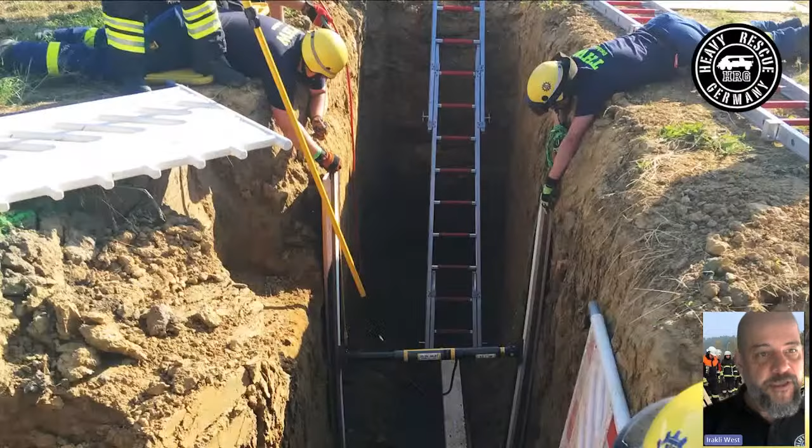So just to kick things off, to manage expectations, etc. And why this picture? What you see here is what we're going to be talking about. The first step of trench rescue is what you see in this picture. Hold back your questions because hopefully we'll have a proper explanation about this a bit later. But this is what we're going to be talking about.

A little bit about myself: born in 1968, and I'm active since 1985 as a volunteer firefighter in Germany outside Munich. The main vocation is with a USAR team. We're an INSARAG classified light team. I've been to a few deployments. I'm a team leader. Don't worry too much about the lingo, it's German. I am a consultant for one of our counties around here. We're setting up a system for trench or USAR, which I'll talk about a little bit later.

Heavy Rescue Germany itself exists since 2009, and it started parallel to my work with Paratech, where I was employed 2009 to 2015. We started working in Germany when it was very empty considering equipment. So we set up this HRG, as we call it, to offer training together with the rescue equipment. We've been on our own, independent since 2015. We are a distributor for Paratech for about half of the country, and we manufacture our own equipment. We also do training.

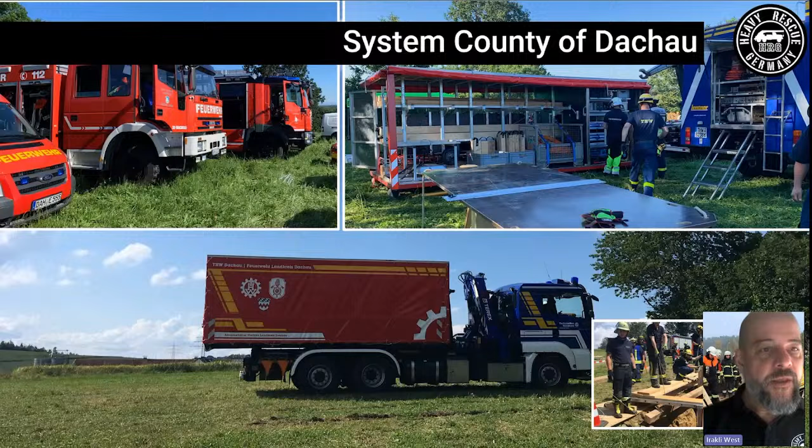So as an example of how this works, now without going into too much detail, we have a separation in Germany between local fire departments and the Federal Agency for Technical Relief. They're federal, they're the blue guys basically. And sometimes there are two separate entities. So we would have the fire department starting the work, and then all the heavy stuff comes in from what we call the blue guys, or THW is the short for that organization.

And what we'll see here is basically the system we have in the county of Dachau, which is close to Munich. We have first due fire departments that are trained in trench rescue. And further along the line, we will get this pod, which has got all the timber, the shoring, more struts, measuring equipment, etc., which will be brought by THW.

So to give you a little understanding of where we are, we did write a book. There's only one book in German about trench rescue, and it was written by us, where we introduced what we call the rescue shoring to this country. Thanks to all the information and all the courses we did in the States and the UK, we translated that into German, not only the language but also the entire system, including all the sizes, the dimensions, etc., to have something that works in this country.

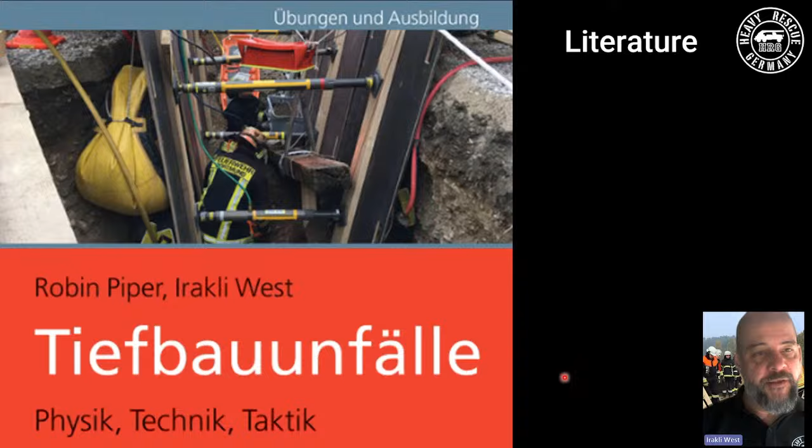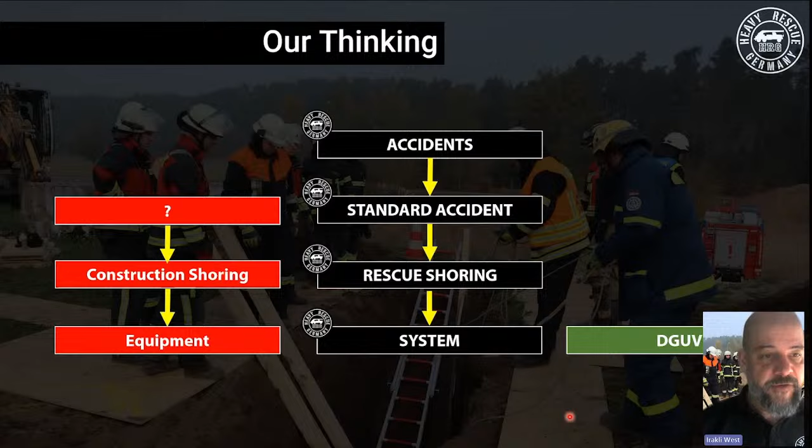This is a very long topic, and you could go on for hours and hours. So we want to concentrate a little bit on the first due. In any accident, the first responders will be either private persons, but we're talking about rescuers, which in our country will be a fire department with a rescue engine. And we'll look a little closer at what they can do to make sure this entire incident is managed the right way, and we get the right equipment with trained guys with the right training, etc.

At Heavy Rescue Germany, anything we do, we will split into 5 steps, which are a bit of a help especially with topics like trench rescue or USAR, which are not very everyday and not very common. It's a little bit difficult to find the right word. The first step will be a 360 to get an understanding of the situation. And this first phase ends with a communication with orders about what to do.

Then we want to secure the site or the incident, which means we will freeze it in place and make sure it doesn't get worse for the patients and for ourselves, the rescuers. In case of trench rescue, we would start shoring, and we would also start preparation of the rescue and actually perform a rescue. Something fire departments like to forget in training is actually about the patient.

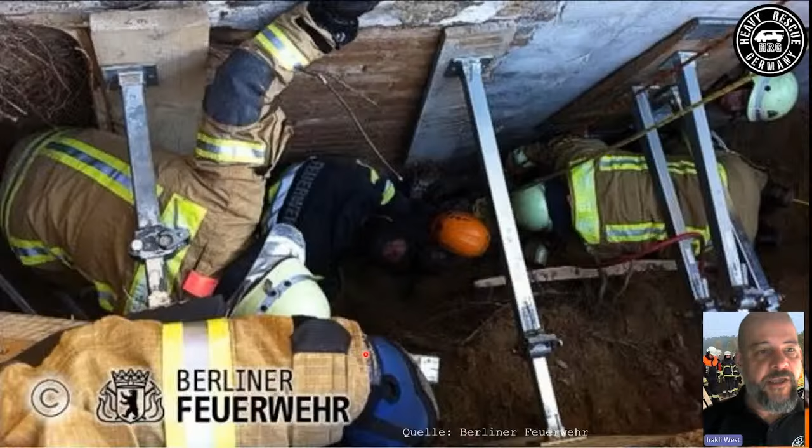So let's look at real accidents, what they look like here. And here's an example from Berlin, where it's a very typical type of trench rescue accident where a private person will dig out soil around a wall, a basement, to perhaps put a new liner in the basement or repair some bricks or whatever. And of course, private people don't know much about regulations and all that, and so they dig it the wrong way. There's not enough sloping, etc., and they get trapped.

And what we see here is very typical for our country, where we would have some kind of struts put in and no real shoring panels, and also the clothes worn. These are their normal firefighting clothes, so they tend to be sort of heavy and they're nice and warm, but they're very bulky.

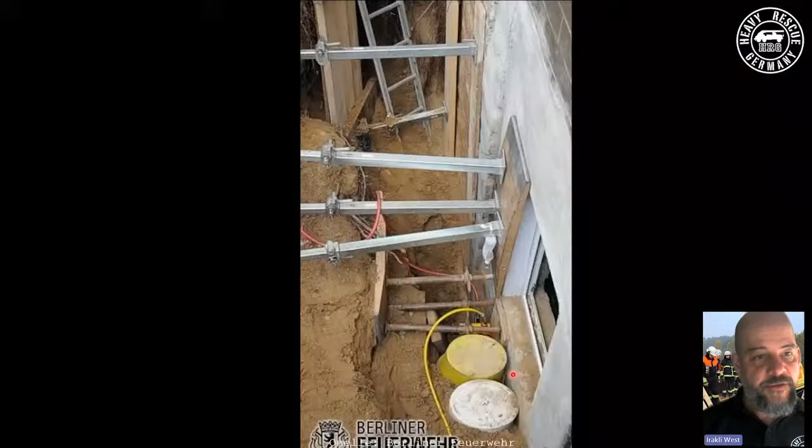So here's a couple of impressions. And what's typical of trench rescue is that it's a lack of space, basically. So at the top, you might have like a V-shaped trench where it sort of goes narrower towards the bottom, and at the bottom there's no room at all to work, and that's very typical, and that's not a German thing, that's a normal thing. So you must expect difficult working conditions.

State of the art, or state of things, until recently, or still is actually, is what we see here, which is a trench rescue, a partial collapse. And we'll see the type and quality of shoring that's been done is not too great. And one thing that's very important is when we show examples of things that could be done better, it's never a criticism of people in the picture. It's a criticism of the system, which is responsible for making sure that rescuers are working in a safe environment.

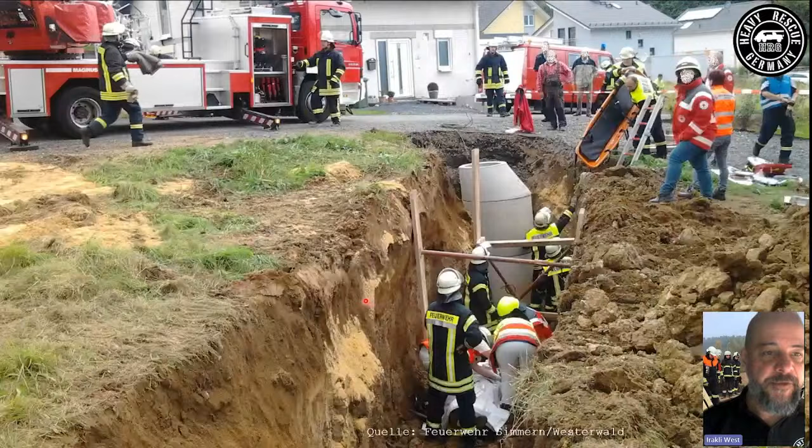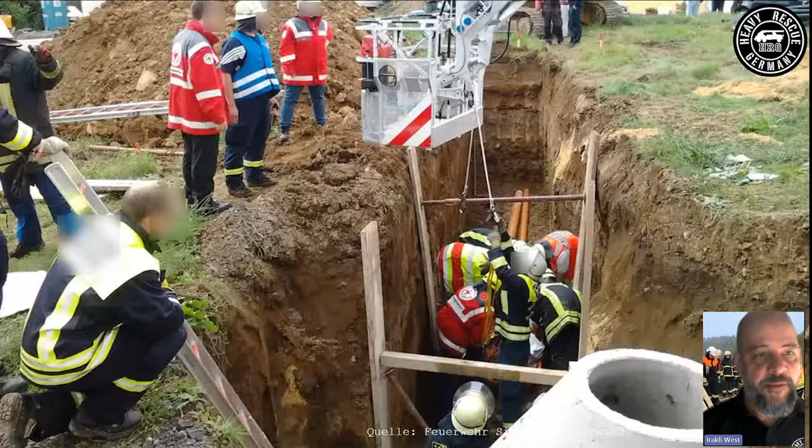So basically what we see here is more sort of cosmetic type of shoring, and won't really work, especially if the soil is active and will put pressure on that shoring system. Same here. Another example is very sandy soil, partial collapse, and there is an entrapment. And basically here we're working with what would be standard on a rescue truck if you haven't geared or prepared for trench rescue.

So just as a summary, they don't happen very often, trench accidents. They're very hazardous, very dangerous. It's very easy to underestimate the forces in soil, the weight, the forces. We tend to not be very well prepared for that, but it's fundamentally a requirement for us because it is an entrapment, and as a fire department, fire service, we must get active.

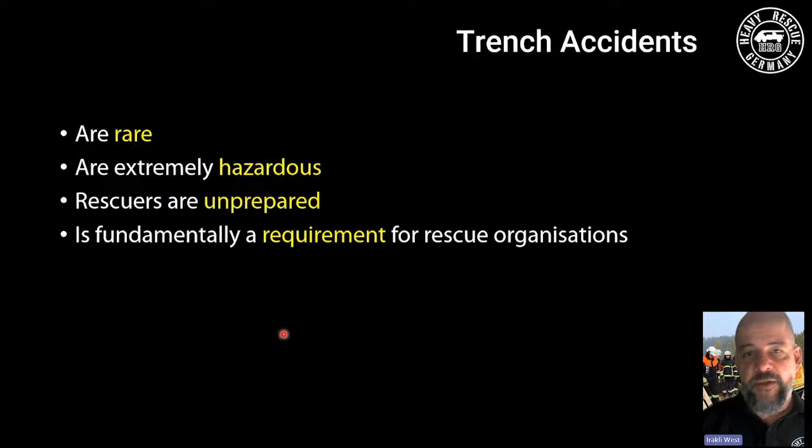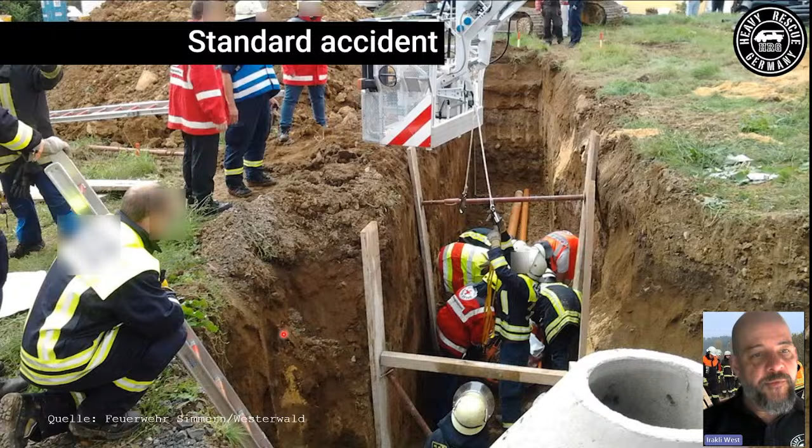So, as discussed earlier, we did define a standard, and no matter what we do, we'll always define a standard, whether it's heavy rescue, etc., because it makes it easier with a very concrete example to look at how that will be solved. And this slide we've seen before, this would be our standard accident. And how do we define it?

What do we see? First of all, we have a partial collapse. So one side of the trench wall is collapsed. It's an entrapment. There's one patient, partially buried, and conscious and communicative. You can talk to him. And why is that? It's very often a discussion of how much time do we have to rescue a person, and just to avoid that type of discussion, because there are so many different types of accident, this is basically any technical rescue.

The patient will define your rescue mode, and if the patient is conscious and communicative, that means from a medical perspective we do have a little bit of time, so we don't have to immediately jump down there and endanger ourselves. So we have a little bit of time to do some shoring. In terms of dimensions, it's 2.50 meters deep and 1.20 meters wide, as in this trench.

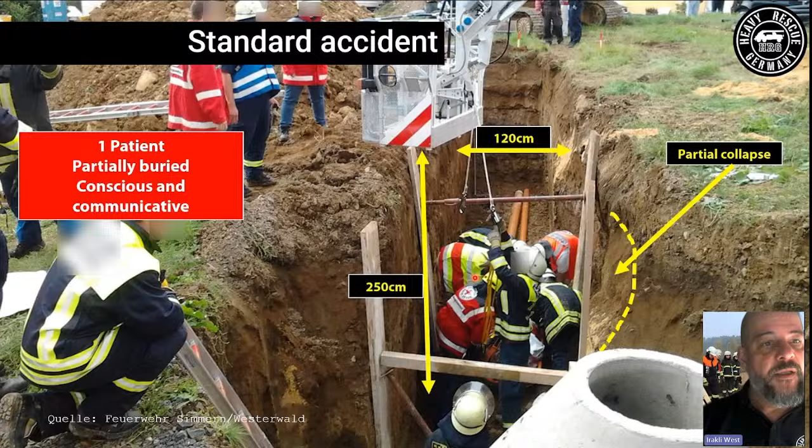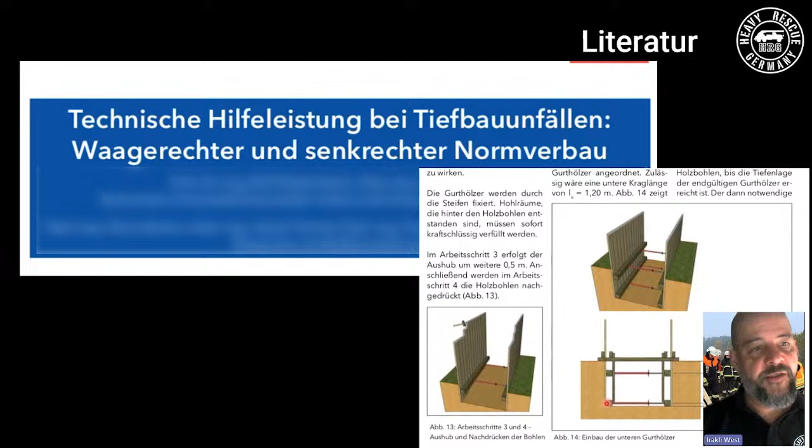The construction shoring until now is what we see here. That was actually part of the curriculum, so it's been taken straight out of construction companies, how they would do it. And of course, it's not realistic because we arrive to a trench that's already there, that's collapsed, and we don't start from zero.

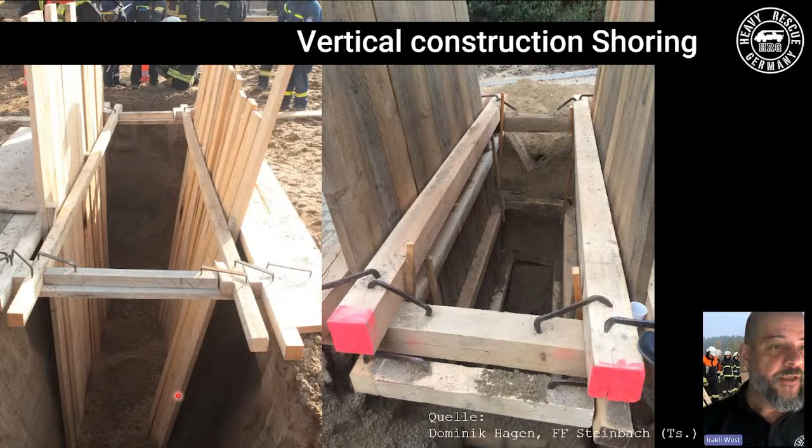And that's what it looks like if you want to build it. Construction shoring, which doesn't work, just because we see it from the left. The left picture, there's a rotation, a collapse in here, and all these planks have been moved inwards, and there's no way that can be shored up properly. There's no backfill, no transfer of forces. It's very extensive. There's a lot of stuff happening, a lot of equipment, and basically still not secure until the last struts are put in. So it's kind of not realistic.

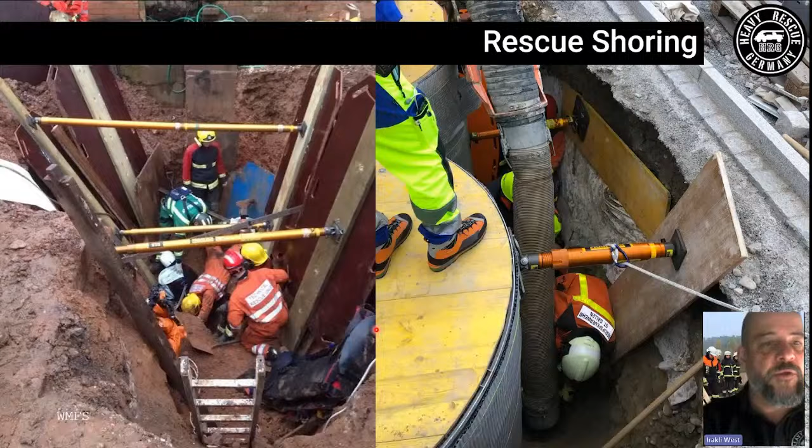We're looking at what we call rescue shoring, which some of you or most of you might be familiar with. That, of course, gives us a lot more options. So on the left, a picture from the UK, which shows actually how this system works with a real trench collapse, which will never be parallel, but always very, very difficult to shore up. Here to the right, same thing in Switzerland, which was like a week after we went down to train them, and they actually did have a real trench rescue. And you see here with those containers, the concrete, the barrels, it's kind of impossible to make a straight shoring there. And it has been used in this country and is starting to be used.

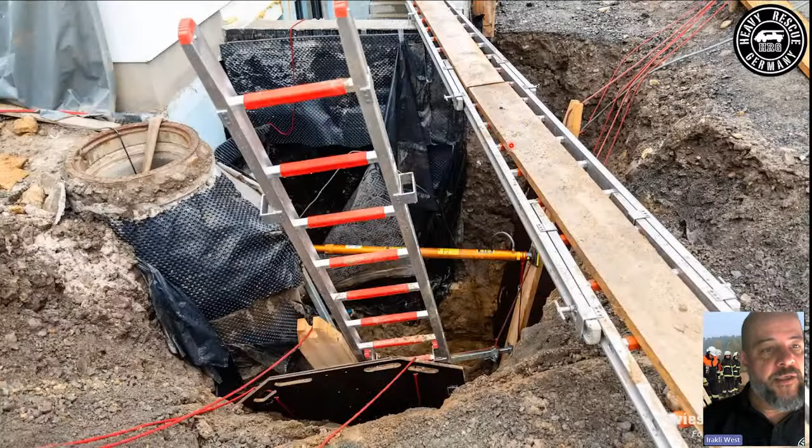So we see here an example from trench rescues a couple of years ago. Well, we do have a panel in here. We do have a pneumatic. We have a Paratech strut, and again, the size, the dimension, and so on of the hole kind of makes it impossible to make a proper shoring exactly like in training. You must be very aware of that, but it still needs to work.

So why does it work? Why does rescue shoring work? First of all, you put two panels in there and a strut, and that's it. You've got an immediate first kind of shoring in there to secure around the patient, and then you grow it. It can also be sloped to a certain degree, up to 20 degrees, we say. We can put backfills, and basically we want to transfer a conduit of forces from one side to the other. It works a lot better than construction shoring.

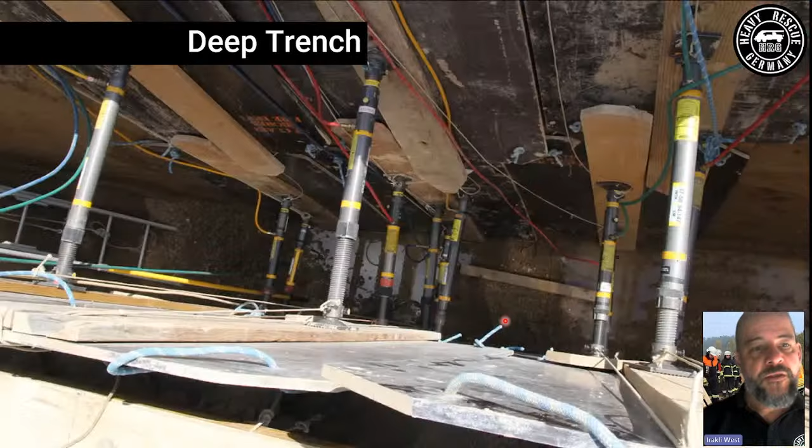Something else that's possible is deep trench. We do have maximum limits, depth, etc. We'll talk about that a little bit later. But deep trench here is up to 5 meters deep. Two layers of trench panels, and you can see it's a large amount of trench panels. We have 6 on each side, so up to 12, just to have a secure working area at 5 meters depth. So of course it puts a lot of pressure, a lot of requirements and logistics.

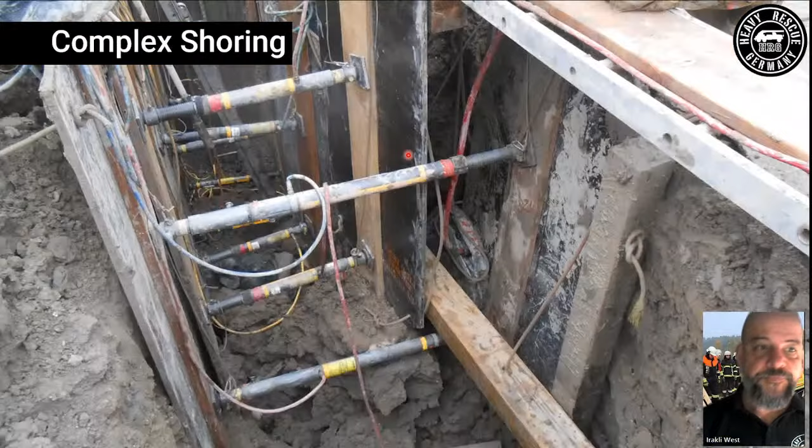And down to complex shoring. This is probably, I'd say, the most interesting trench we've ever done. That was with UK USAR. It was different levels of depth, different widths, and apart from that, the entire week was very cold and very muddy. And one thing that really impressed us was the rescue equipment, all the struts, all the controllers. They worked that entire week without breaking down. So it was actually quite amazing.

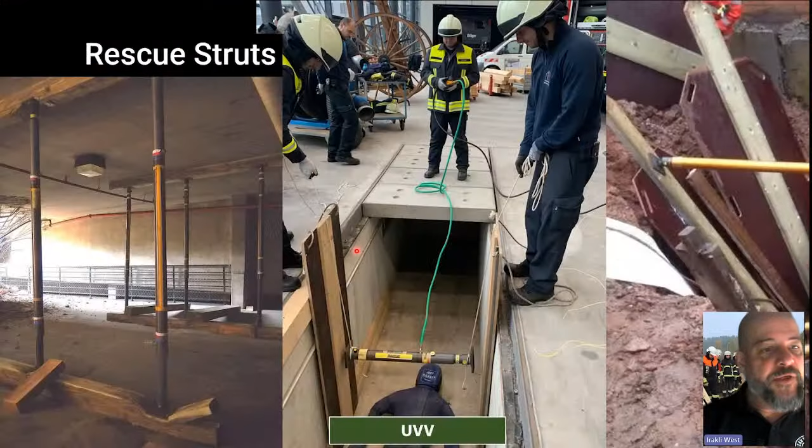So yeah, the rescue struts, Paratech struts, are central to that, with the possibility of putting air on them, so they're remote controlled basically, so you don't have to enter the trench to do your shoring. That's one main thing, of course, in terms of what they can take in load. Now, if you turn a trench by 90 degrees, you get building collapse. So this is a vertical shore, but technically it's the same thing, and you can see down here this piece of timber. It's a 20 centimeter piece of timber that's been compressed, and gives you an idea of how much weight these struts can take.

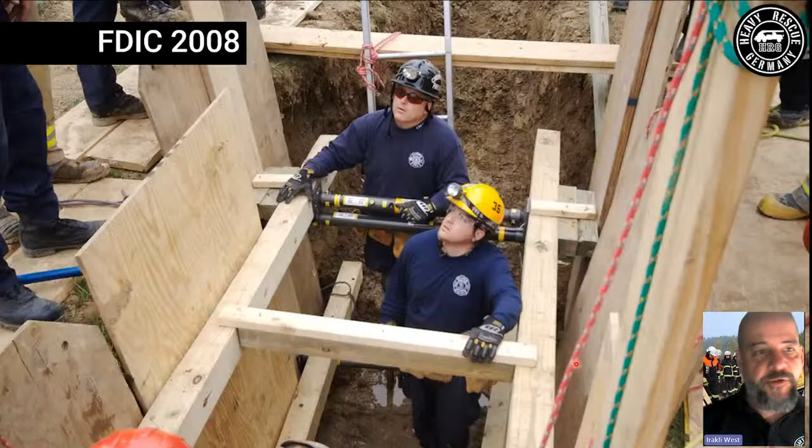So where did it all start? Just a little personal journey, whatever you want to call it. It was a visit at FDIC 2008, where they do these hot trainings, and I kind of put the tick in the wrong box. I think I was supposed to do some kind of CBFT, but ended up in what we see here. That was the first impression we got of the struts and of shoring. And that was quite interesting because I hadn't seen anything like this over here in Germany or in Europe, and it completely baffled me. And so that's where it kind of started.

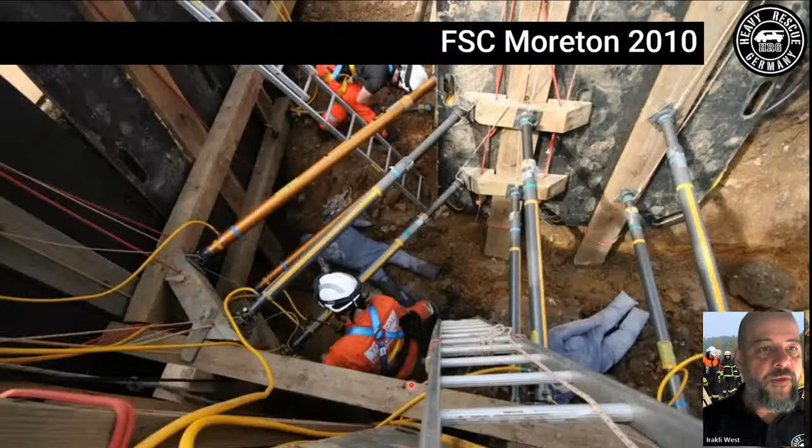Also, in terms of how much knowledge and training is necessary that goes into this. And also interesting to see the kind of materials used. We're way beyond that now. This shows how much has happened in the past 15 years. But especially before Corona, the years before that at USAR, how much they experimented and took things forward. I had the pleasure of doing a course in the UK at what was called the Fire Service College back then, the sort of National Fire School. And so the first proper extensive training we did was a 3-day training with the USAR guys.

And here's an L trench, which is probably the most, I'd say, difficult type of thing to do in trench rescue. So all that was done from outside. And here again, we see sort of the old-school, old-fashioned way of securing an L. We don't do this, the outer thrust block and stuff. It's done differently now. But anyway, that was pretty good.

So yeah, we went to UK USAR a few years in a row, and also sort of saw the progress these guys were making with the testing and all the ideas they had behind it. That was really cool. So we took a lot of that back with us and translated that into our German system. It ended in 2019, sadly, because of Corona, and we haven't been back yet. So hopefully at some point... I'm sure these guys have moved on and done new stuff. We kind of followed that and have done new stuff, which we really have to look at. But that's where we are.

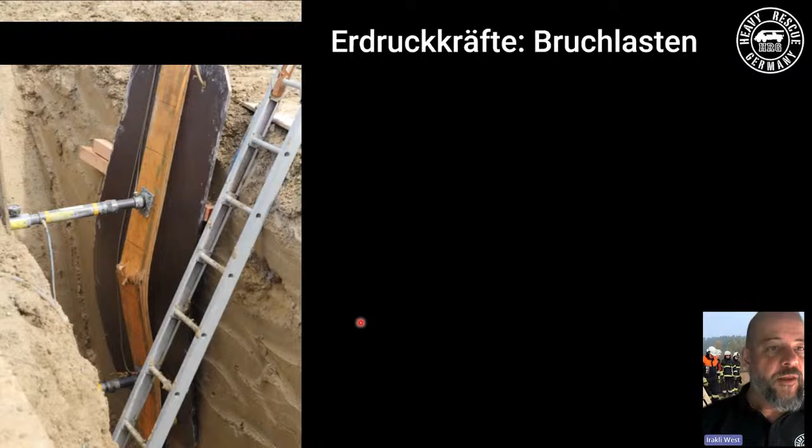And I'm sorry, I forgot to translate the title of this slide. So what they do over there is they do load tests: when does stuff break? So like a point load on a trench panel at a correct spacing. You sort of measure the strength, how much it takes to break them, and out of that you can sort of deduce how well a system will hold with the expected soil forces.

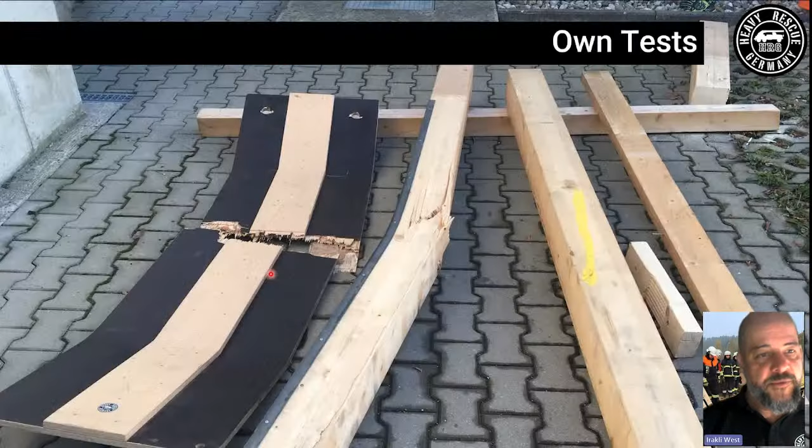So we did those kinds of tests with standardized equipment over here. And in our team we've got 2 engineers. They talked to the FEMA guys who did all the force calculations and stuff. So we came up with basically tables, distances, equipment and recommendations which fit our system with our materials. And obviously around the world, materials are different, so it would have to be adapted to wherever you are, if you use a different type of timber, thicker form boards or trench panels, etc. So our distances and our forces work for what we have over here.

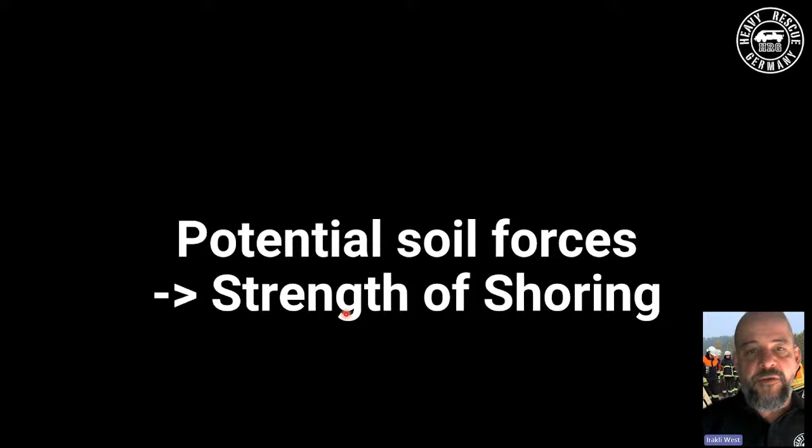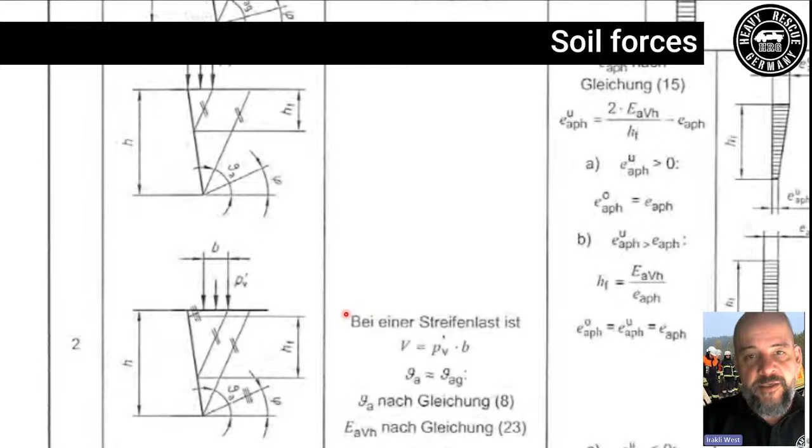One very fundamental thing to understand is the potential soil force that happens here. Basically, if you Google it, you will get a lot of things like these. That's if you want to build a new building and you need like 3 floors for a garage beneath ground level, etc. You'll get a lot of these, but these assume intact soil. And what we don't have in trench rescue is intact soil. It's soil in movement, active soil. So basically, what we do must withstand the potential that happens.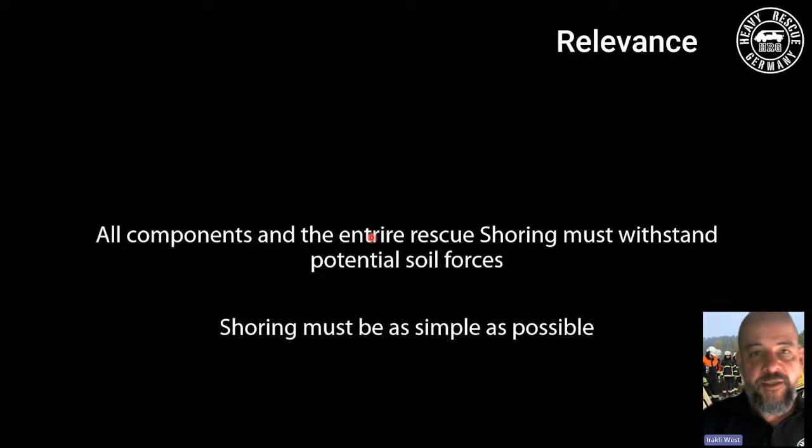And the second thing is it must be as simple as possible. So any normal firefighter, whose everyday job over here is a lot of medical calls, or a neighbor is not answering and can you go and check, and then we go and check if the neighbor's still there and why they're not opening the door, etc. But part of the mix is of course technical rescue, and especially USAR stuff doesn't happen very often, so it's not in our minds. So you've had 3 medical calls, and the 4th one is a trench rescue. It really has to be simple, a very simple way of working.

So what we've done is we've translated all the potential soil forces, the breaking strength of equipment, etc., into a simple table. For example, you don't really need to know much more than: if it's a normal trench, all shores must be placed 125 centimeters apart, vertically and horizontally, and that's all you need to know. If you're in doubt, if the trench is a little bit wider, then you might want to look up where you have to double the shore or decrease the distance between them, but it's still very simple. So that's all you have to remember.

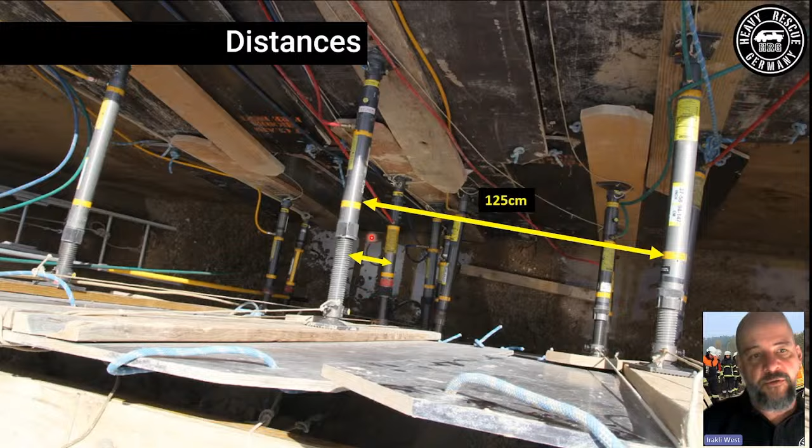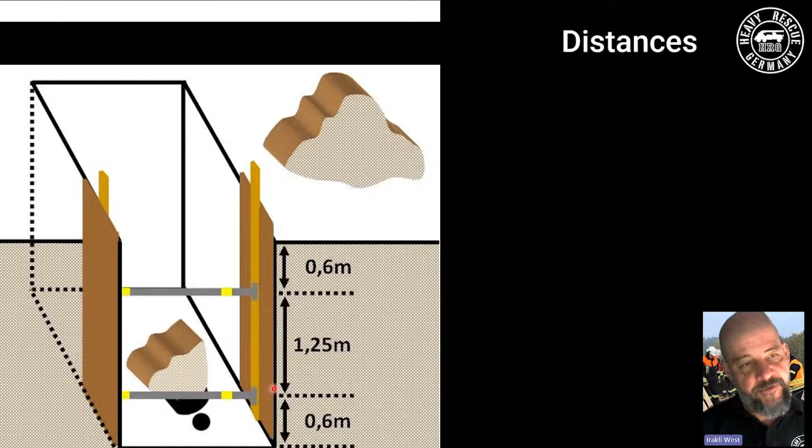And why is that? We have a standard size in Europe. These panels are 2.5 meters, and basically we've got 60 centimeters from the lip and 60 centimeters from the bottom, which are maximum distances, and 125 between the struts. So for a standard panel, you should be able to work with 2 struts.

There's also regulation. We won't go into too much depth, just to give you an idea, of health and safety, what would be, I suppose, OSHA in the States and HSE in the UK, etc. There are basic distances and depths. From a certain depth, you must do some shoring, etc. But of course, if you get called to a trench rescue, it's because this didn't work. It wasn't followed. So therefore, it's not really applicable to what we do.

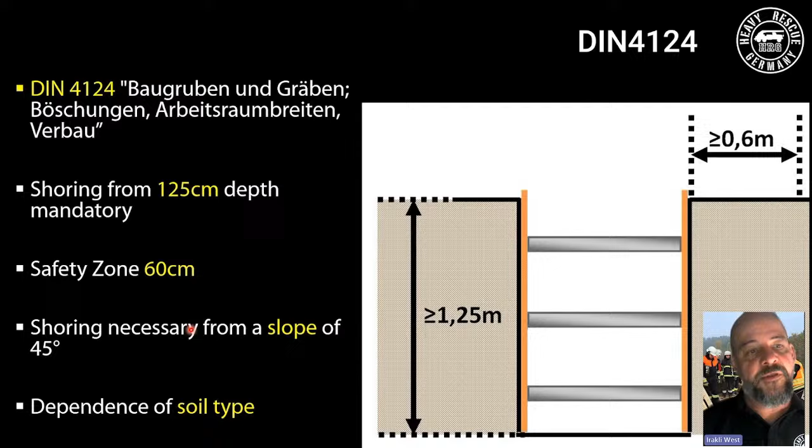And also, I won't go too much into depth, but there are different classifications of soils. There is a DIN for that. And basically our shoring has to assume the worst possible case, because there has been a collapse and we don't know when, where and how it will continue with its collapse. So therefore we have to assume the worst, and that's what we've done.

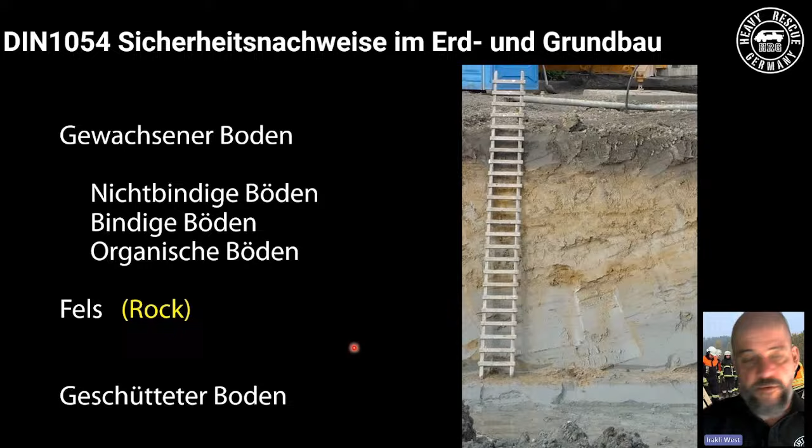Right, so why do trenches collapse? Why do we have collapse? And how do they happen? The factors: obviously, whether regulations have been followed and complied with. The soil type, so you might have a very loose soil, and especially where you have two different soil layers, in between there might be less friction, so that's where they break and fall apart.

Might be water coming in, groundwater. We might have what's called disturbed soil, so it's not the first time a trench has been dug right there. And of course the age. If it's a really old trench and you've just removed all the commercial shoring, then obviously it'd be less stable than if it was a freshly dug hole.

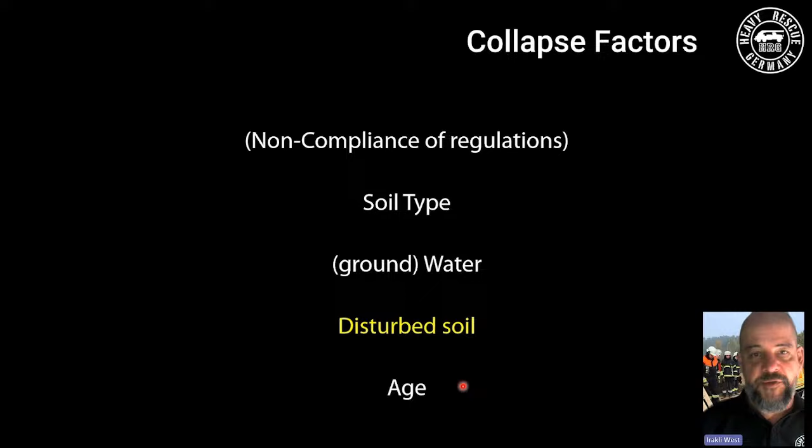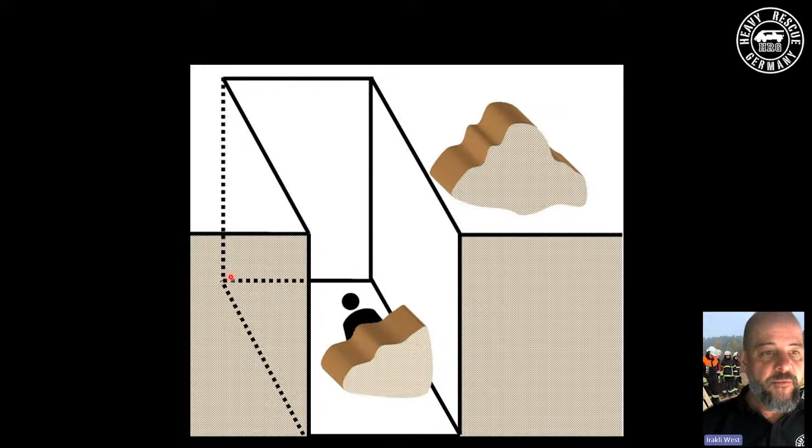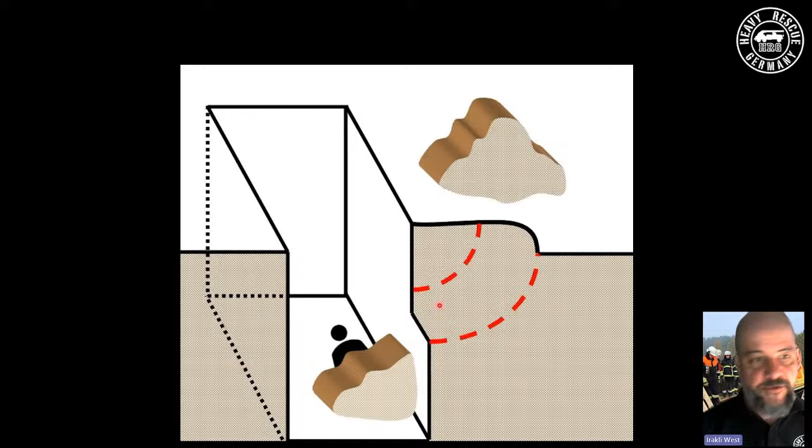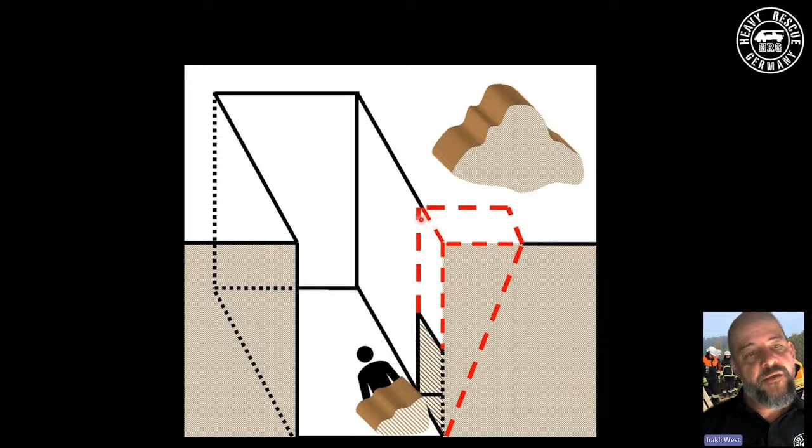So we have a rotational collapse at full length, or a rotational collapse at half height, or we have what's called a wall shear. The entire wall has broken and fallen down. And we have a little bit of stuff that's come out at the bottom. These are actually the most critical ones, because we have a lot of overhang, a lot of weight which is not supported. That brings forces up to the top, and cracks and fissures might start to happen on ground level.

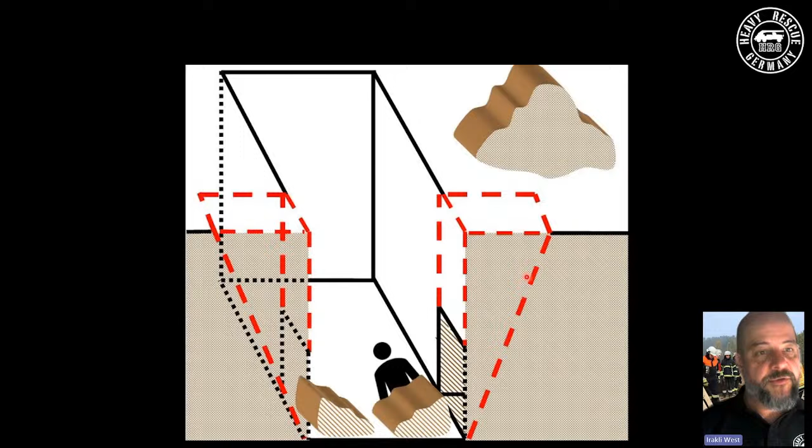Obviously, the same can be on the other side, and from our research, usually the trench collapse will continue. The secondary collapse will happen opposite of the first one, not next to it. It's not to say it's always like that, but it's most likely. And if you have an L-shaped trench, then the inner corner, which is not supported on two sides, might be the more unstable part of it.

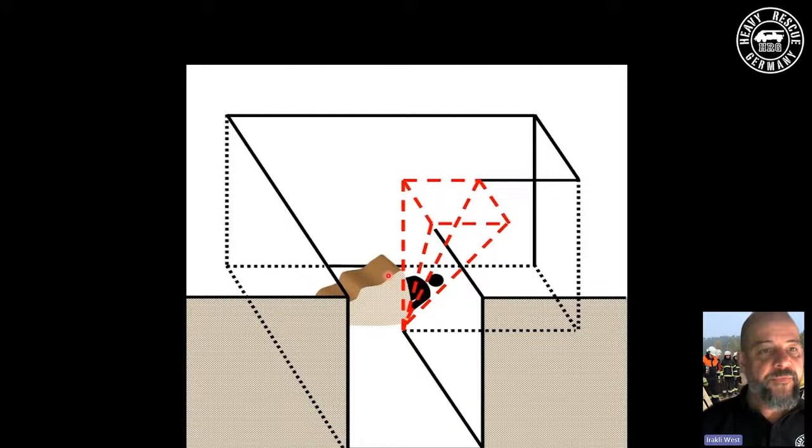The patient: again, this is more of a technical presentation, just to be aware of what we could expect from a medical perspective. The patient could be panicky, or have trauma, broken limbs, etc. Suffocating, in which case it becomes more time critical. So-called suspension trauma, which means, I hope the translation is all right, basically if you don't move your limbs and they're cut off, the blood cools down and collects in your extremities.

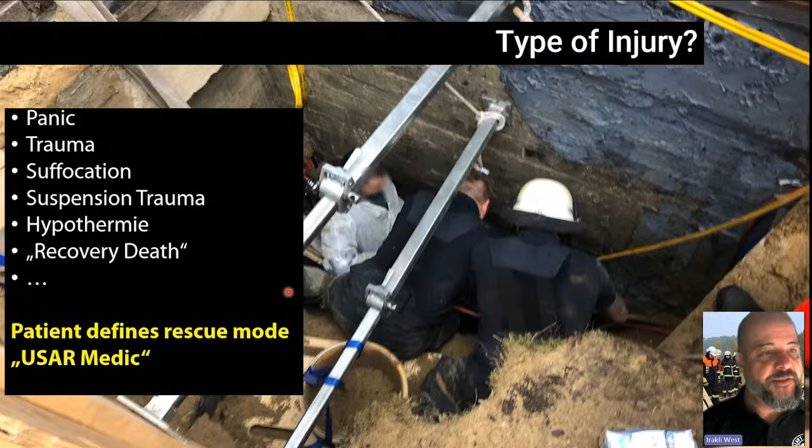Hypothermia, yes, and so-called recovery death, which is closely related to suspension trauma. Your patient is hypothermic, all the blood in the extremities is cold, and you bring the patient up, you put him horizontal, the circulation starts to work again, and basically that's when they pass away, just because of this bad blood, in very simplistic terms. That will be an issue.

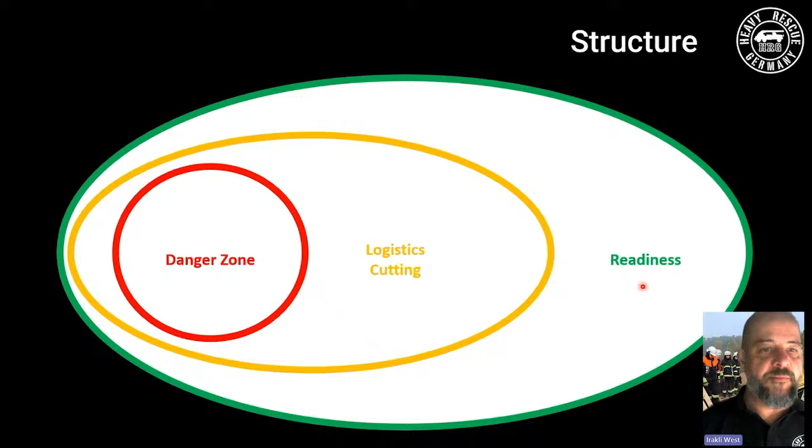We like to be structured, so we have to think right away of how to structure the entire site when we arrive. You have 3 zones. First of all, the danger zone, where the actual accident happens, where you just want rescuers who actually have a job to be there, and equipment that's needed, nothing else. Then you would have a wider cordon, which is yellow here, for logistics and cutting. Then readiness, any other units that might be called upon but not needed right away. They park a little bit further away. Don't worry about the German names, it's just the graphics.

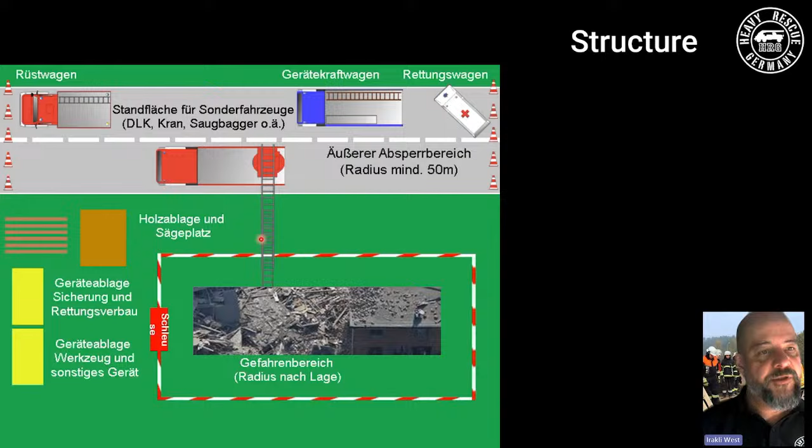What we have here is the trench. In this case I think we see a building, but it's the same thing. If we can cordon off with a single point of entry, it's always a good thing, though in trench rescue not always easy. And you would have the equipment and the cutting station. It's very likely you'll have to do simple cutting work like shortening timber or making the trench panels narrower. And keep a free space for a crane or a turntable ladder to do an elevated fixed point, or a vacuum truck.

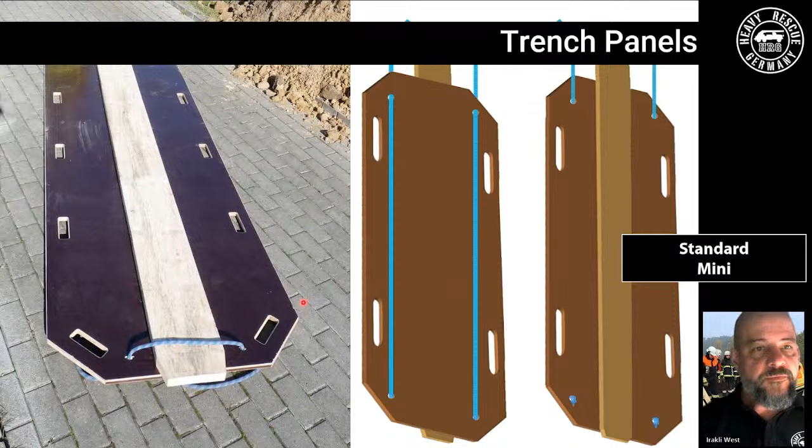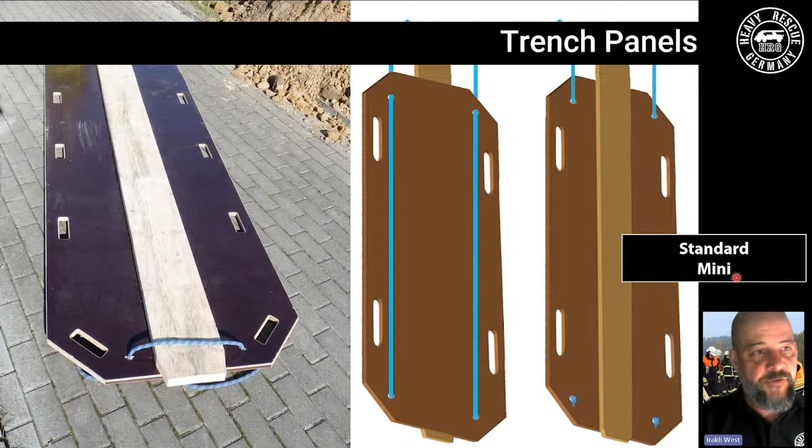The trench panels themselves, they look like this. They have certain material, and we did mention there's a standard size, but you can also make mini ones to fit your truck. The logic being that it's better to have some than none at all. And even if they're smaller, they're still very useful and will work in a trench rescue. Where they work pretty well is if you have a lot of curves, and they like to be more flush than the big panels in a trench.

So here we are, our 5 steps, and let's start with our understanding of the situation when we get there. What do we see? All the things that interest us. First of all, what day? Is it day or night? Is it a working day, or if it's in the weekend, it's probably more likely it's a private person. What time of the day?

And when you arrive, the placement of the spoil pile. The spoil pile is what we see in the back. That's the stuff that was in the trench that's been dug out. In an urban environment, it won't be there. It'll be taken away. But like here, it's been put too close to the trench itself, which tells us it's probably a bit unprofessional. But also the size of it and the consistency and how it looks. If it's been there for days and it's been raining, you can see it's an old trench, which makes it more critical.

And it cracks on the surface when we get there, so be careful about going to the edge of the trench. And how many persons are involved? That's not the patient, but outside, do we have any colleagues or family or whatever? And what was done down there, we can find out by asking whether it was gas mains or electricity or what's happening. And obviously, how many patients are down there? It can be more than one, and where exactly are they? If the collapse has happened on an entire length, of course, it might be more difficult to locate them.

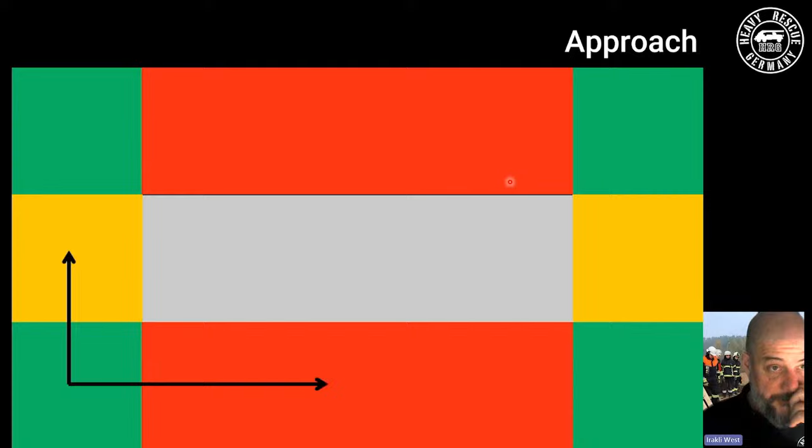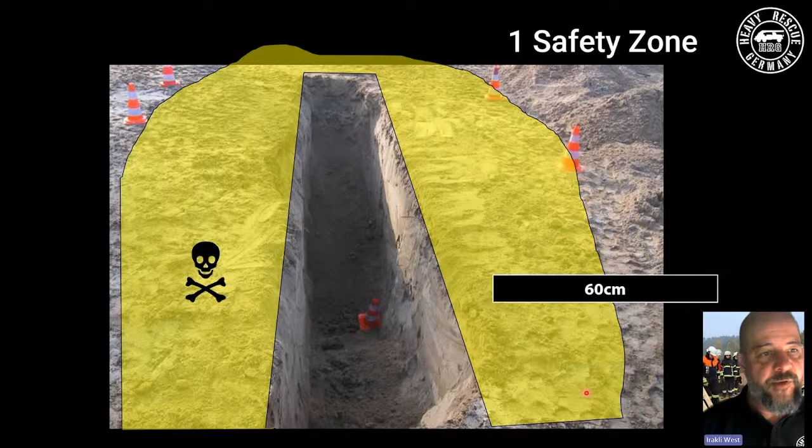If you look from above, the trench itself, a straight trench, will be this gray surface. So you try and approach it from the corners, which are the most stable part. And the short ends would be less stable, and try and keep away until we've secured the trench from the long sides. For a T-shaped trench, it's the same thing. You would like to keep a safety zone, we say about 60 centimeters, where we don't step or do anything until we've secured it. Get as close as possible to the trench and see if you can look inside. If you can, this is a good time to start measuring it, because we do need to know how wide especially it is to be able to put our struts together.

Look at the soil itself. What type is it? Are there any layers of soil? Where did the collapse happen? And what type of collapse is it? And where can you see any further developments? Where else would it collapse? And are there any obvious hazards such as water coming in, etc.

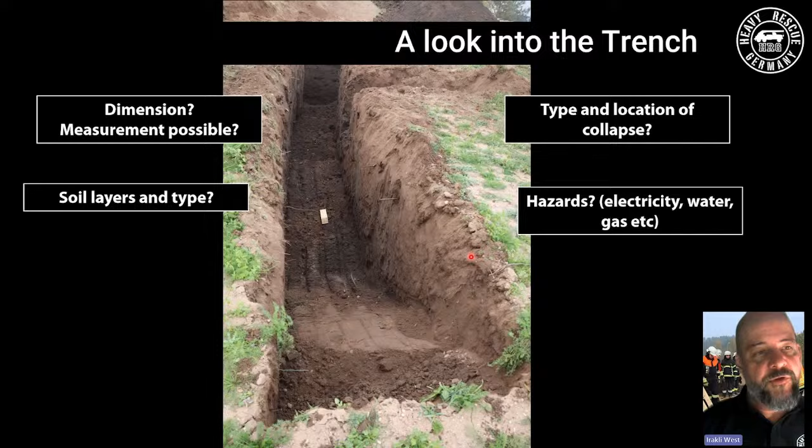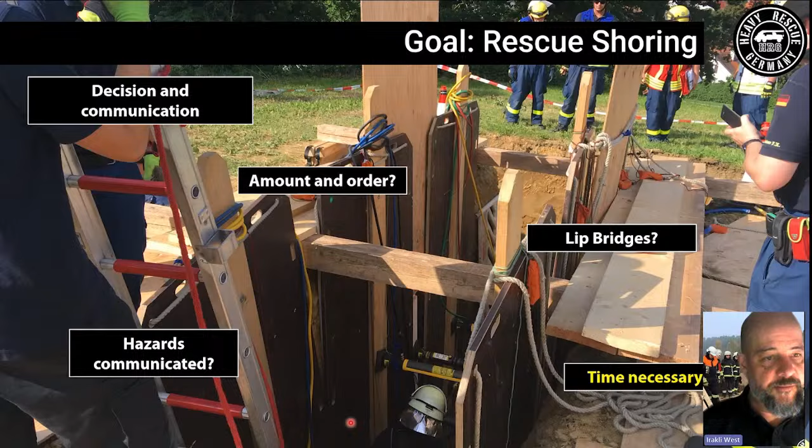And these fire departments have built them. So it gives us the opportunity to train how to work the equipment and procedures before we actually go out in the field and work in a real trench.

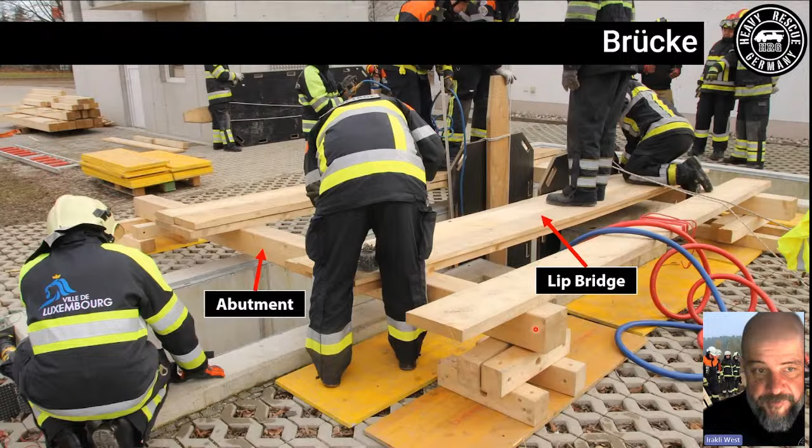So what you see here is the lip bridge. This guy here is standing on it, and his weight is being carried away through these, I think it's called abutments, but I'm not sure that's the right word for that. In any case, the transfer of the load is happening here, which is away from the lip.

For our rescue engine, there's a possibility to do the same thing with ladders. Now this is a bit of a demonstration. It's too short and too close to the edge of the trench, but if the trench was much narrower, that'd be all right. Or we can double the amount of ladders.

We will very likely in this country have 2 rescue engines on site right away, which means we have 8 ladders, so we can double all these ladders. And for the bridge, to be able to run it, we put a plank or something. And as it's a construction site, it's very likely we should be able to find a tough plank or something like that. So now we get to work, and how do we go about it?

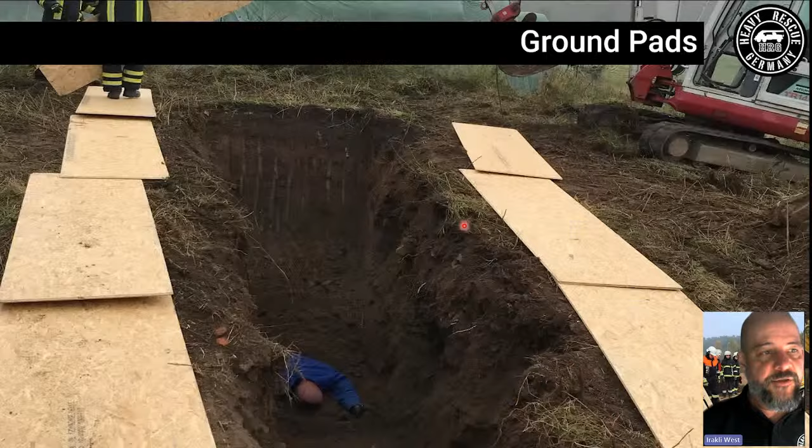The first thing we want to do is put out ground pads, and that's basically just any kind of, in this case, what's on the truck. Ladders will work as well. You can even use spine boards. You can use whatever. It's just to spread the weight. And one thing you don't need to do is to put them, like we see here, everywhere around the trench before you even start working. You want to be as quick as possible to set the ground pads right where you will do your shoring, or you will build a lip bridge, etc.

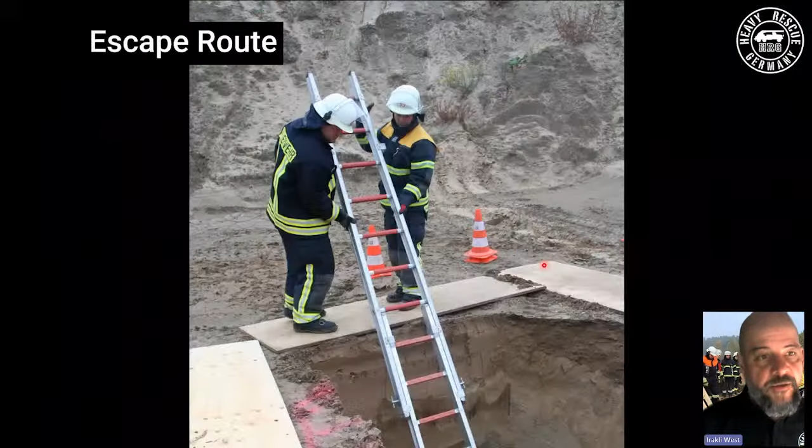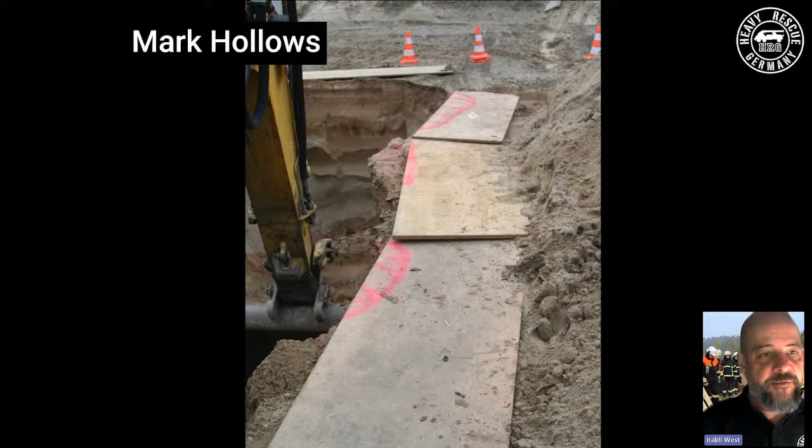Second thing that goes in is a ladder, which is an escape route, an egress in case one of us, a rescuer, falls down. That's a way to get out as soon as possible. Ladder goes in first and comes out last. If you have any hollows or voids underneath your ground pads, you might want to mark them with a spray.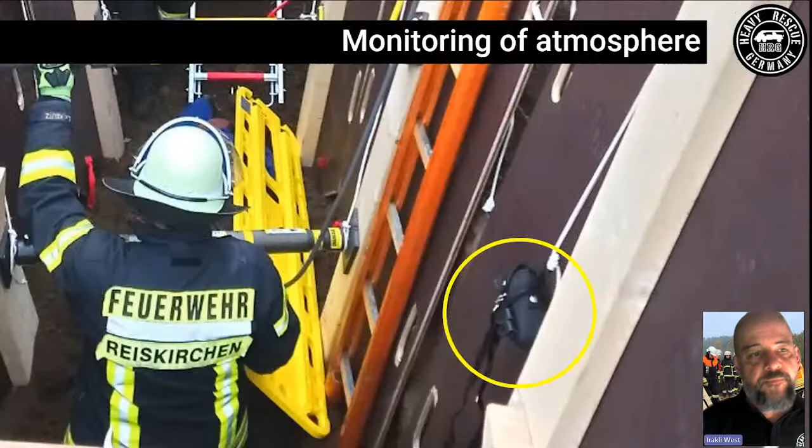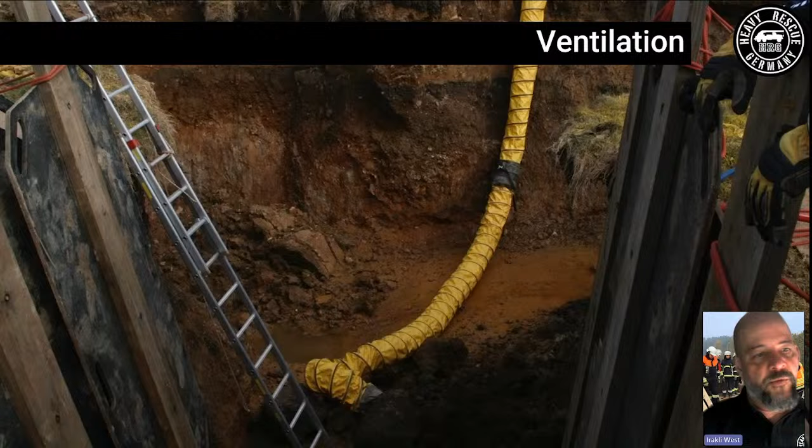Pretty soon, because it's technically confined space, you want to monitor the atmosphere, and we usually put 2 monitors down, one at half height and one at the bottom of the trench, and we will always ventilate if possible. Regardless of what the measurement is, just make sure we do have some fresh air down there. What doesn't work is to put a heater with hot air. It just makes the air unbearable down there and does not warm up the patient at all.

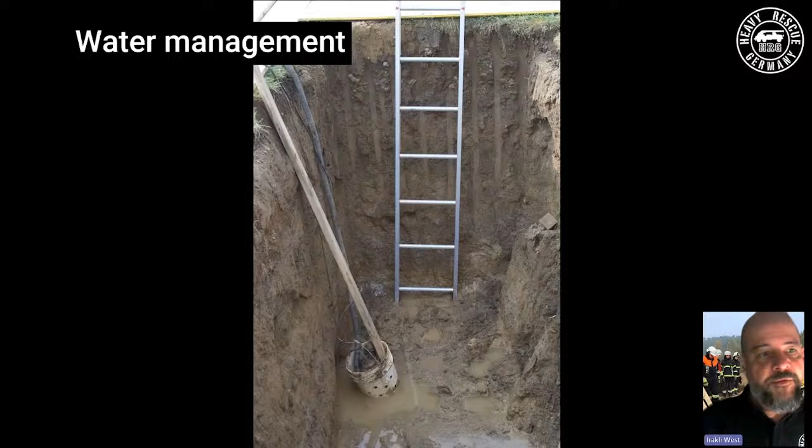And obviously, if there's water down there, what we call water management, just throw a pump in there and make sure the water level is kept as low as possible. So that will be securing, no more than that. And now we start working on the rescue shoring. I'm sorry, the securing might include putting up a lip bridge as well.

So rescue shoring, if you want a rapid or initial shoring, just to get something down there, we put 2 of the panels down, and we put 1 strut, preferably at half height. If you have full-size panels, it'd be at half height. But now it's all options. We don't have to do that. If the situation allows, we can put the first strut already at the right position, a bit lower. But in this case here, that's what we want to do: 2 panels and 1 strut, and that's it.

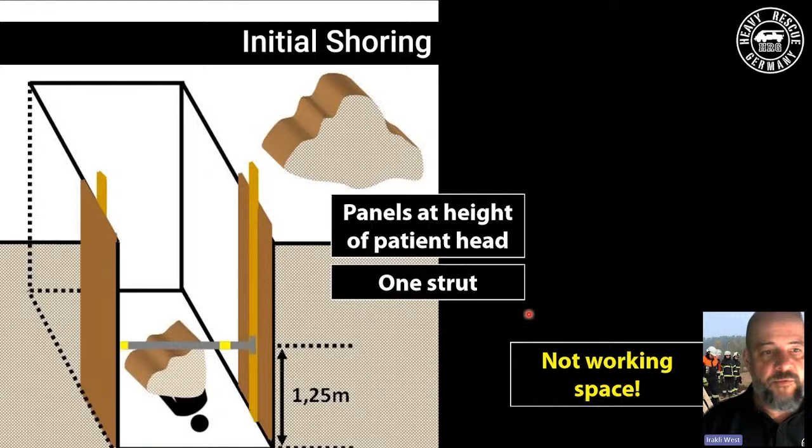So we're talking about 10 minutes after arrival, which is our goal, to have this kind of setup to prevent more stuff falling down on the patient and endangering him even further. Just to be clear, it's not a safe working space. It's not considered safe for us to go down. It's just a quick way of making sure the patient is safe. So that's what it looks like in an exercise we did.

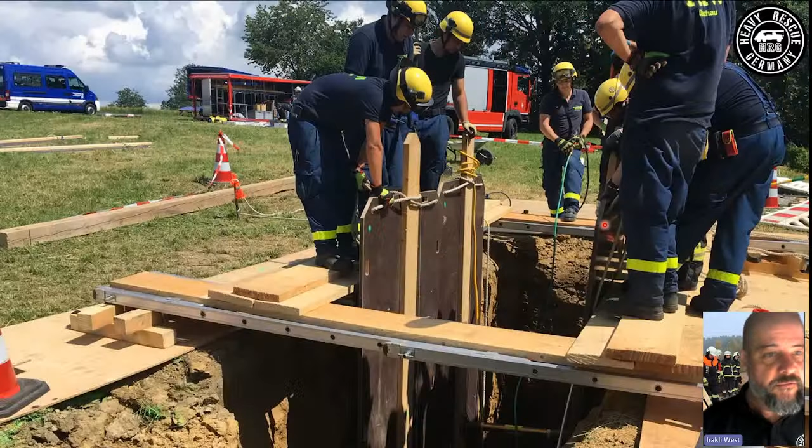And to continue, it looks like this. Basically, we built a bridge, again, a lip bridge. And you can see here the girders, or what do we call them? There's two ladders, again, with a plank on top. And we start putting panels in there. There's already the initial strut, you can see.

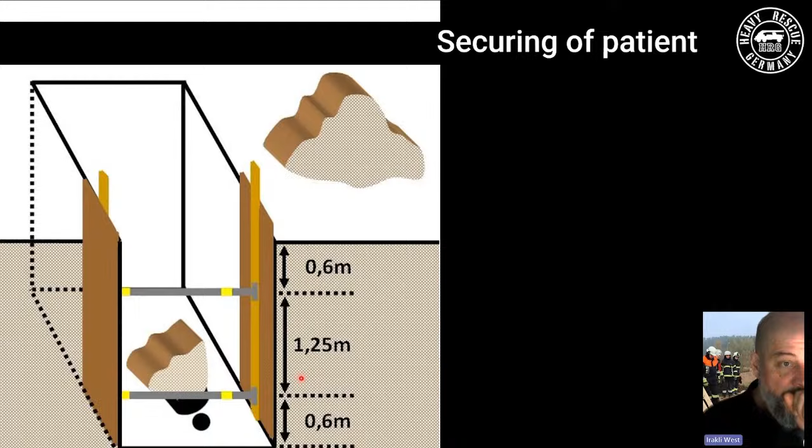And those would be the distances we would want to aim for. It's not always possible, especially since the bottom of the trench isn't always straight, or the lip is not always an exact 90 degrees. It can be a little bit sloped. But you want to be no more than 60 centimeters from the top and no more than 60 centimeters from the bottom, and your maximum distance between the struts would be 1.25 meters. If it's more than that, you would have to add a third strut. So it's kind of a growing system.

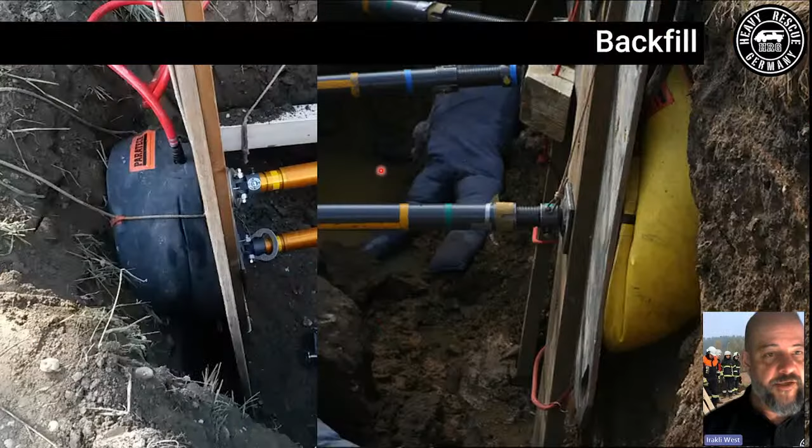In case there are voids, we need to make sure we have load transfer, so they would have to be backfilled. And for this, it's pretty much the only case where low pressure bags still make total sense, just because they are large and they make sure the void is filled really well. It's a little bit more equipment to work with, but it makes it safe and works really well.

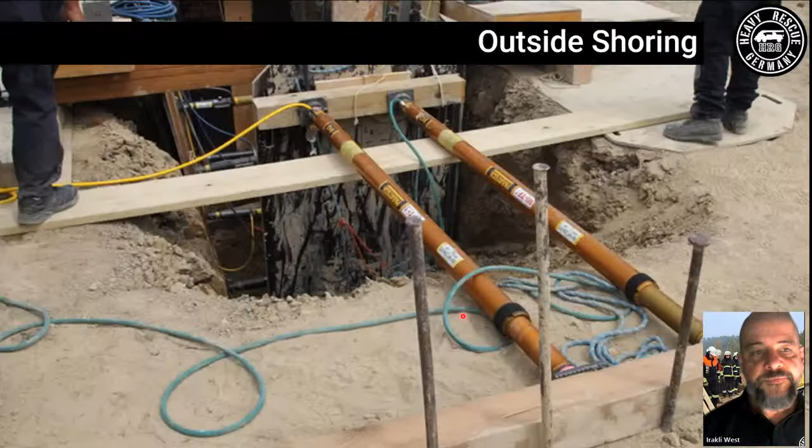If we are sloped at more than 20 degrees, then we would have to set the panel straight and make sure we have some sort of shoring. We call it outside shoring. Here's a panel that's standing straight, and obviously we can't backfill this. It's too much of a slope. So we simply use, basically, a lying down double T, if you're familiar with shoring. That's what it is. It makes sure the panel doesn't twist. Just one strut behind is not that good because you would have torsion in the panel, and here we can avoid that.

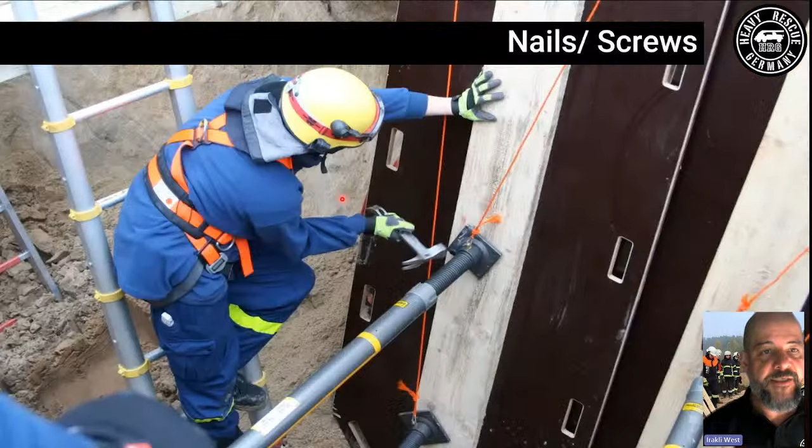Here's a smaller version. Here we've cut a panel in half, and the load transfer is happening here. That's when the void is too big for rescue bags, for low pressure bags. When we enter the trench, you want to make sure you fix the struts. You can use nails or screws. There are different schools or beliefs. We use screws. It's just less vibration.

When you go down, always start with the top ones, and you work your way down. And you need those, of course, because as we said, it's active soil. We do apply some pressure, which will ideally be around 500 or 600 kilos per strut, which translates to 16 bar for the Paratech struts. And if you apply that kind of force, it might compress the soil and loosen other struts that are already in there. And obviously, if they are not fixed in place, they would fall further down. So that's why you want to secure them.

And if you find one has become loose, you might have to fix them further. And a good tool for that is what this guy is holding, the Paratech shoring hammer. It's a really good tool for that. And it's actually made to tighten the collar of our Paratech struts.

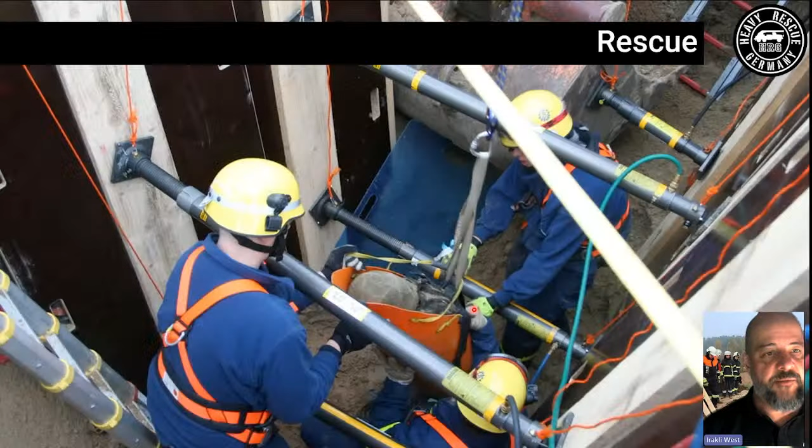Work really well, but only as long as you have some very big drill that can loosen the soil. But otherwise, it's all entrenching tools, all these tools that don't take a lot of space. And for the actual rescue, of course, just keep in mind there's not a lot of space down there. So there's not a lot of equipment that will work properly, and it has to be very compact.

So what we have here is like a SKED. There are several more modern versions of a SKED, but that type of rescue equipment works quite well down there, just because it doesn't take up that much space. A normal litter would not work at all down there. And also keep in mind, you can't use the struts as a ladder rung or something. You can't step on them.

That's a no-go. So in the end, as a rescue, just make sure you set up in parallel: when your rescuers go down and start digging and freeing the patient, at the same time you would already have a plan of how to rescue the patient. You could use a turntable ladder, a crane,

or if you're out in the field and there's not a lot of access and so on, like here, we could use the Paratech bipod. It's a good tool for that, much better than a tripod. A tripod would have to be right over the trench, and that will usually be very difficult to achieve. So we recommend the bipod.